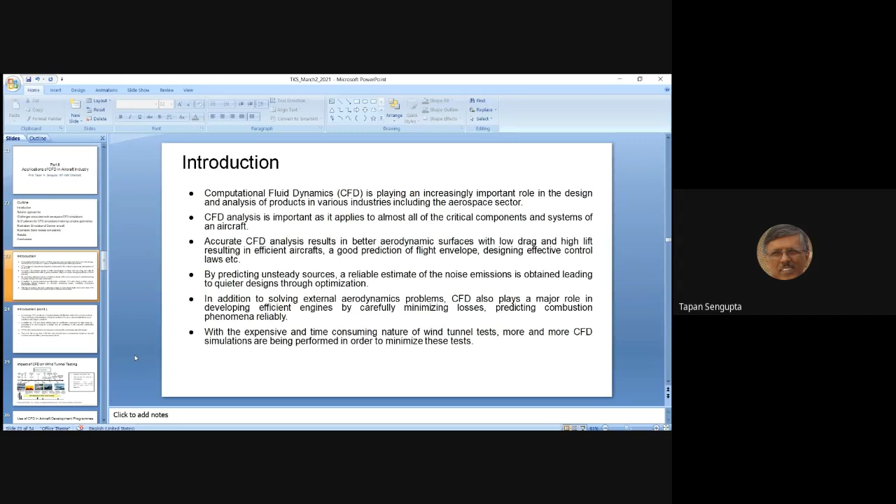It was only after the 1960s that the role of theoretical and computational fluid dynamics came into the picture, and the design loop involved these elements for various subcomponents, the wings and the fuselage, etc.

So you are now being told that increasingly we are going to use CFD results, which will replace the wind tunnel test. But what remains to be done is to calibrate our CFD results with actual flying aircraft data. That is what you acquire in performing flight test.

This is your ultimate test, because wind tunnel tests are also limited. Why? Because we do not test the full scale aircraft. We actually use a small scale model of the flying component, and that's where the scale effects come in. In addition, you put it inside a wind tunnel, so the wind tunnel wall has its adverse effects and affects the quality of your results. So these are the limitations.

That's the reason we would like to replace as much of wind tunnel testing as possible. And of course, because of the smallness of the scale of the model in the wind tunnel, we do not match the flight parameters. We need to match the flight conditions, and that can only be achieved when you are doing flight testing.

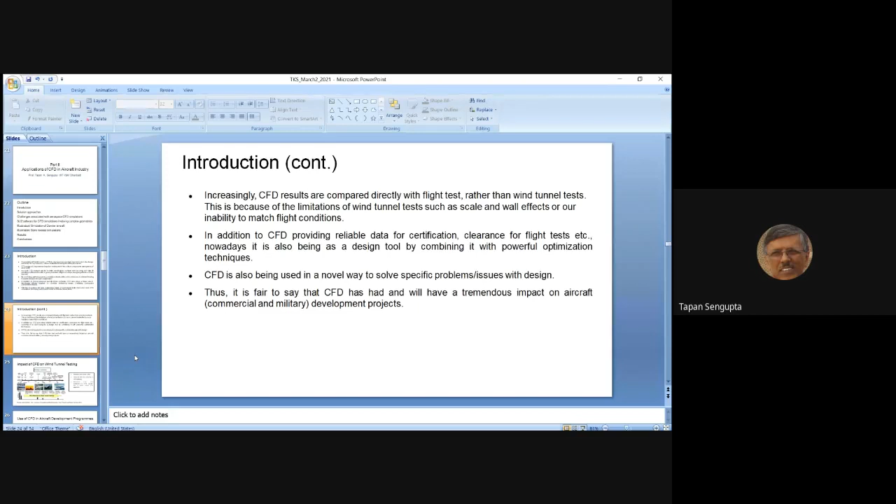So you can see that CFD is doing a very good job. It is taking up a new role to solve specific problems or issues related to the design of an aircraft. Thus, it will be fair to say that CFD has had and will continue to have tremendous impact on aircraft development. I am not going to talk too much about military aircraft, but that itself is a very exciting branch of study, with its own specific problems which we'll probably not discuss today.

Now let me show you a slide borrowed from Professor Tony Jameson from Stanford University, from a talk he gave in 2015 on the status of CFD, from the early days of 1980 onwards up to 2015. The 1980s decade was exciting because it was in this decade that Professor Jameson himself was the first to produce results past a Boeing 747 jumbo jet by solving the Euler equation.

That was the first demonstration of the ability of CFD to tackle a full aircraft, of course excluding the viscous effect, and that was done by Professor Jameson. So he is probably the right person to give this nice talk, and I borrowed this slide from his presentation. As you can see, the tools here relate to the Boeing aircraft series, and various reports and methodologies are given on the top row. The tools existing in Boeing are also given here, involving a hierarchy of formulations, starting all the way from potential flow to the Reynolds averaged Navier-Stokes equations.

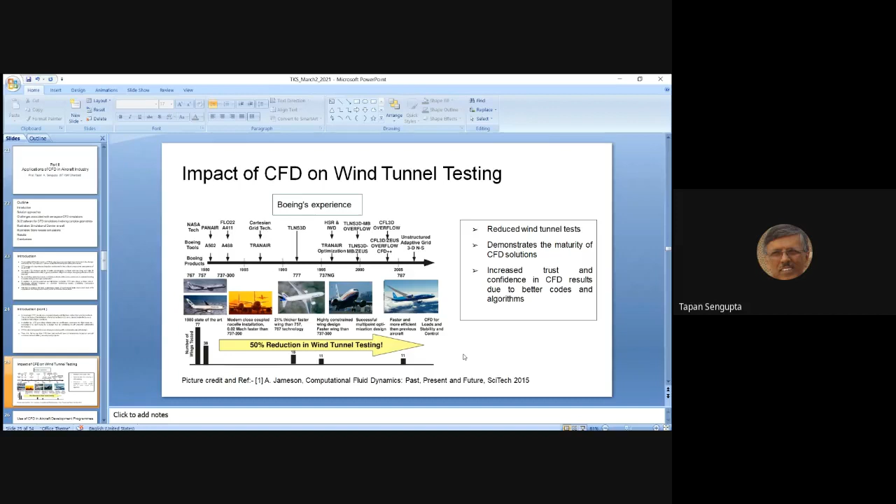Now, we were talking about this use of CFD in aircraft development programs. So you can see that when it comes to commercial aircraft development, this is well documented in that paper I just now referred to, Professor Jameson's AIAA conference SciTech paper.

And this review paper given here below is work reported by Xiao and Cinnella. This talks about quantification of your RANS simulation. And you want to really quantify what? You are using different types of equations, different types of models in the equation, and you want to quantify how accurate those results are. This is published in Progress in Aerospace Sciences. It's not a very big paper, but it's a fairly well documented paper for one to go through and understand.

Both of these references attribute the success of Boeing 737 to the design of the high-speed wing, not only during the cruise configuration when it is flying steady and level, but also how it has actually managed to integrate not only the wing design, but how it is coupled with the placement of the engine. Okay, so this is something that is important.

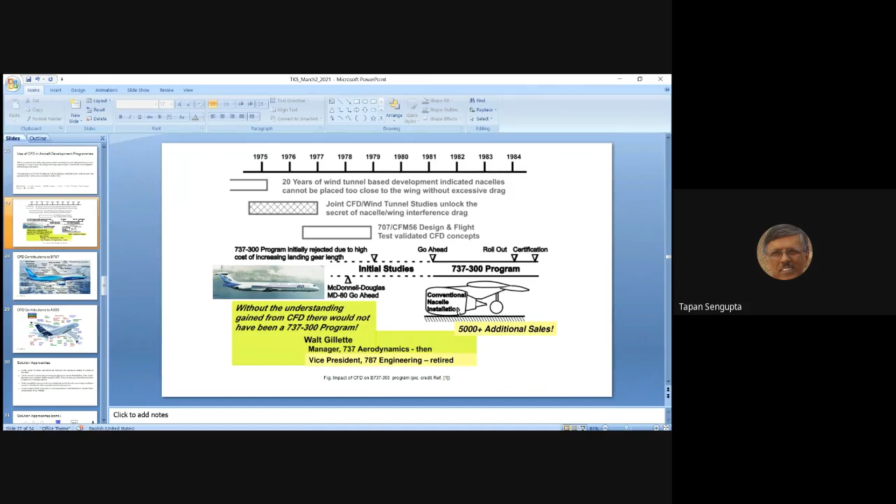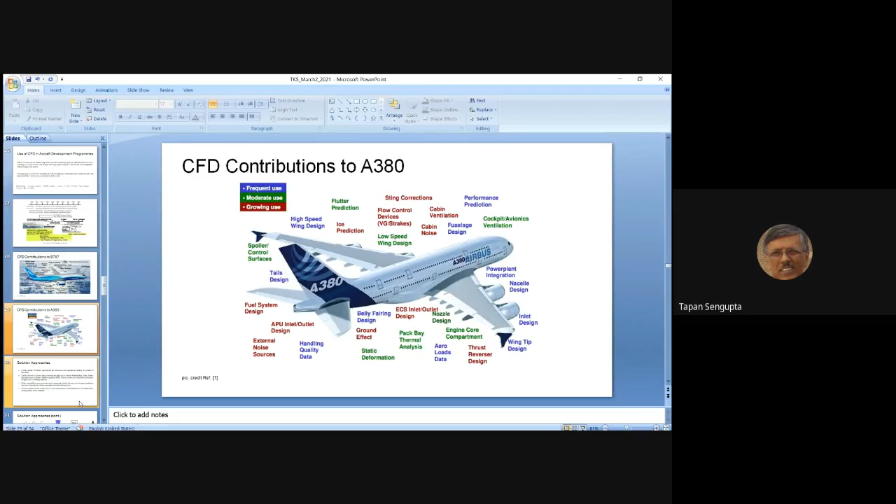So you can see these are essential information. I suppose I'm just sharing information. Maybe many of you are already familiar with it, but still, for the sake of completeness, let me go through the solution approaches, which have various ranges of activities.

For example, I'll show you in the next slide that we started off in the early 60s, where we had a model which was essentially a linearized potential flow model. These are the days where we would use panel methods to solve Laplace's equation. You may be thinking, to solve a linear partial differential equation till 1960?

But let me remind you that during the Second World War, it was Professor Norbert Wiener at MIT who made the first proposal for studying flow past an aircraft wing by solving Laplace's equation, during Second World War, that is in 1944. And it took another 20 years before we actually got the digital computer and started solving the flow past an aircraft wing using this Laplace's equation.

Once this was done, people were interested in trying to predict aircraft performance at higher speed. So compressibility effects come into play, and we enter the transonic flow regime. That's where we came into nonlinear potential flow models. Please do understand, again, we are still making an assumption of irrotational flow. That's why we are using the full potential equation or transonic small disturbance equation in the 1970s.

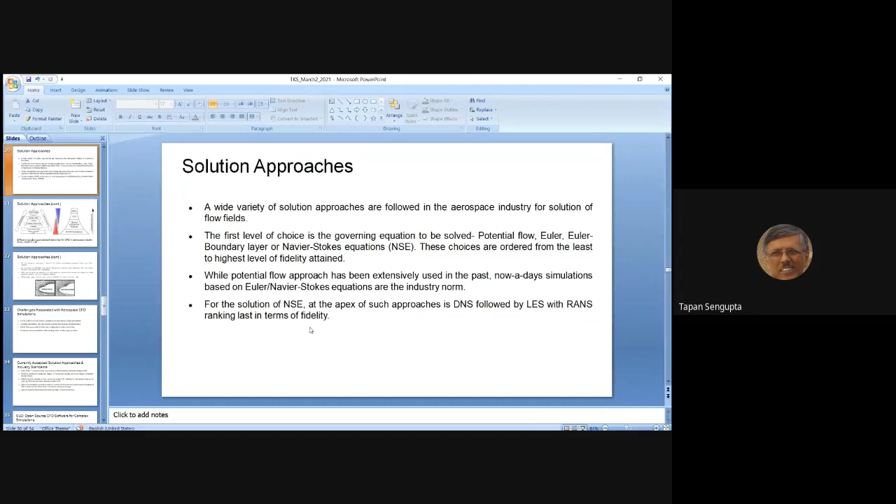So we have now understood what we do. Now, how do we tackle these problems? Tackling these problems requires approaching any given model equation and solving by different methods of discretization. For example, one can do finite differences, finite volume method, or finite element method.

Most of you are familiar with finite difference method. It is the most theoretically resolved part, so I don't need to tell you more about it, but this is the correct differential equation approach. The next in hierarchy is the finite volume approach - it's an integral form of the equation in discrete space. Finite element is actually a weak form analysis, or the variational form of the differential equation.

Finite difference method usually requires structured grid, but these days we also use something called immersed boundary method, which uses Cartesian grid. So for complete aircraft, people are trying to solve the full aircraft solution using Cartesian grid. This is an issue in the making.

The issue is that with finite difference method, you can get much higher accuracy compared to finite volume or finite element method. The advantage of finite volume and finite element method is their usage of unstructured grid - you can see there is no structure here. You can keep increasing the number of cells where you require more accuracy. However, these methods are lower order accurate, so they provide less fidelity, but unfortunately they are more suitable for complex geometry, and that's why most open source software, commercial or OpenFOAM, use this unstructured grid approach.

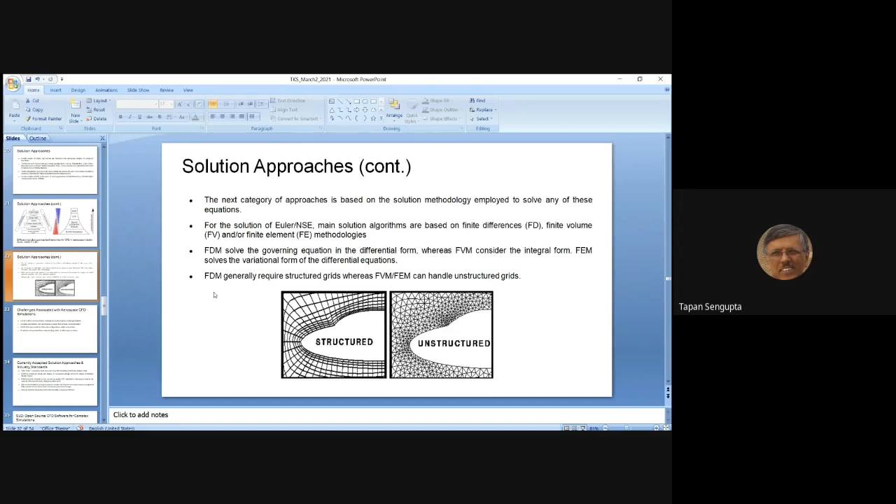So the challenges associated with these are that DNS or LES is impossible for full-scale configuration at this point. However, if we are looking at separated flow past a wing section, looking at the stall of wings, or the landing or climb performance, we still are not there to really solve the problem in its entirety.

That's what we are saying, that full aircraft or turbo machinery simulations essentially involve complex geometries, so there you still are using some of those model canonical problems or unstructured grid method approaches.

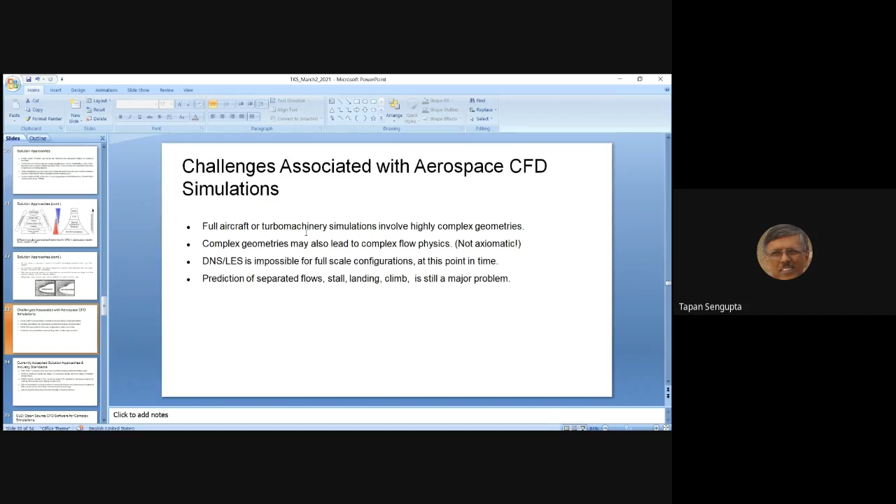There are other methods we can talk about. For example, RANS is employed during late stages of conceptual design and at all stages of detailed design. RANS and its variants are the current accepted CFD standard in the industry. The solvers are dominated by a large number of commercial, in-house and open source finite volume solvers, depended upon because of their robustness and ease of usage.

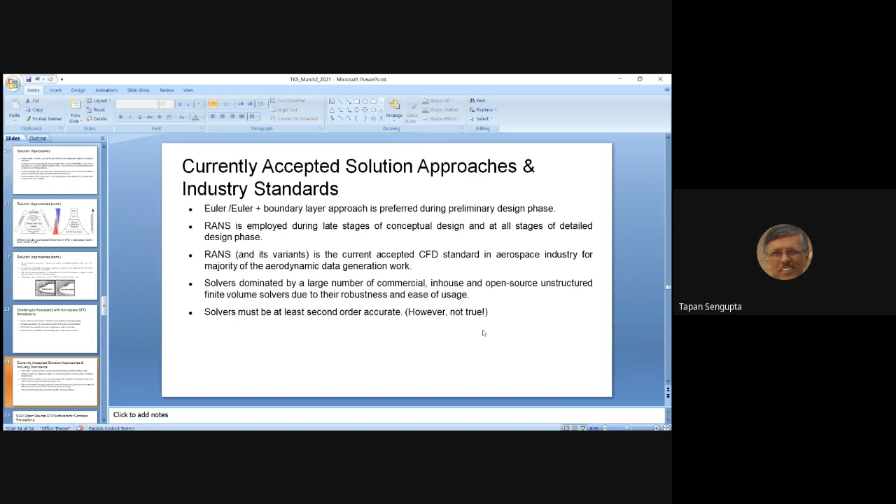One requirement is the solver must be at least second order accurate. Unfortunately, some commercial and open source software do use second order diffusion, so that makes it first order accurate. That's why in parenthesis I said, however, it's not true.

Let me just briefly mention the Stanford University tool, SU2. This is an open source CFD software tool developed at the Aerospace Design Lab of Stanford University, based on C++. It solves various kinds of PDEs, including the Navier-Stokes equation. You can perform not only fluid flow analysis, but also many multiphysics analyses and design problems, and these are available freely.

So this is open source software. Please, if you are keen on using CFD for your research work, do not hesitate, go and use it, because it is designed with CFD and aerodynamic shape optimization in mind. But you can actually also solve problems of potential flow, elasticity, electrodynamics, chemically reacting flows, and many other such applications.

There are various compiled versions, executables available, so you don't have to even worry about them. You got to understand, go through the manual and go through this Python scripts and get ready with your activity.

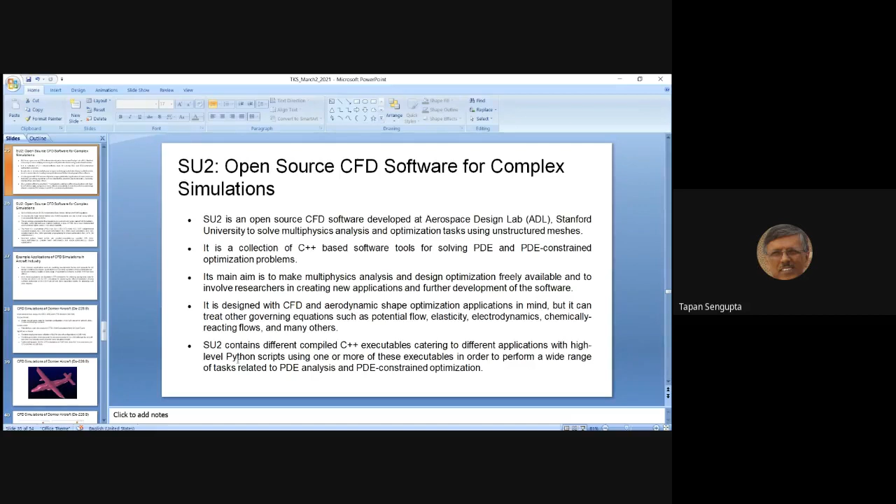So SU2 essentially is in the fluid flow domain, it's a compressible Euler Navier-Stokes RANS solver. It can work in both 2D and 3D, and you can use it for incompressible flow if you use what is known as the artificial compressibility method. Now, the governing compressible flow equations are solved in cell vertex based finite volume formulation.

In recent years, people have started developing the discontinuous Galerkin method, which is basically a type of finite element method. It's a weak formulation, but one of the strengths of the DG method is that it gives you accuracy which is higher than second order accurate.

Okay, and here are a list of some of the executables in SU2. For example, SU2_CFD for the CFD code. Then you have SU2_DOT, it is for design purposes, adjoint analysis. Then you can study mesh deformation, mesh adaptation. Then you can export the solution. Then you can do some pre and post processing for shape optimization using various executables.

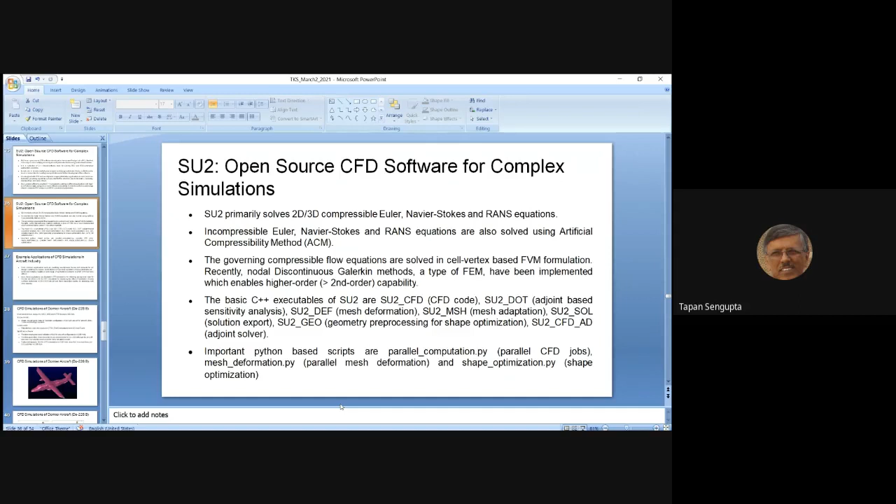Now I'll straight away go and tell you a little bit about some of our activity using SU2 in solving flow past the Dornier aircraft. This is manufactured by HAL since 1982. This work was undertaken by a group consisting of researchers at IIT Kanpur and the CTFD division of CSIR-NAL, led by Dr. Mutkavi.

Okay. The scope of the work was initially to obtain aerodynamic data for the Dornier aircraft. It's surprising that it took almost 30 years for HAL Kanpur to realize that they don't have baseline configuration data, and that was achieved after 30 years of manufacturing it.

The codes we started using were panel code, RANS code, then Fluent and the SU2 version, and this actually was very important because with our joint exercise between IIT Kanpur and NAL, we were the first to employ and validate SU2 for various aircraft configurations.

As it was done initially for Dornier, I am told that the CTFD division has used it for various fighter aircraft for the Indian Air Force. So it's pretty good that we have the ability to do that. I am told in recent times that Tejas also wants to get some solutions obtained by SU2. The activity may have just about begun.

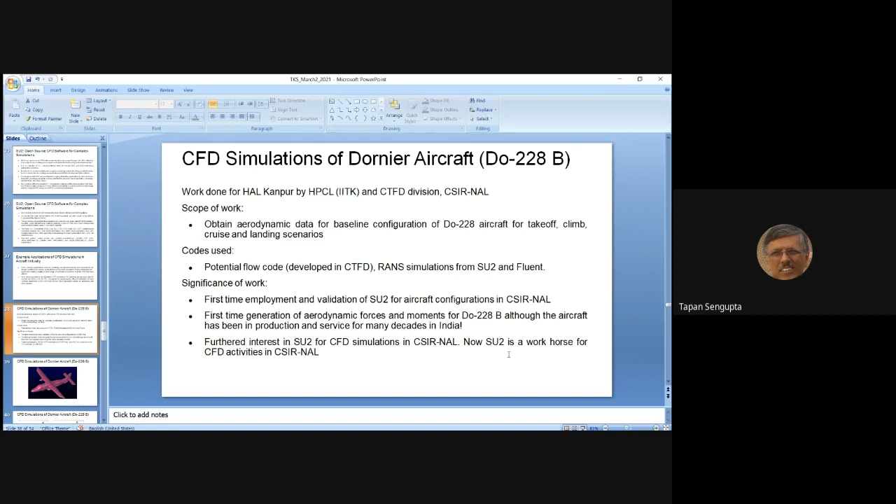So furthermore, interest in SU2 for CFD simulation in CSIR has grown exponentially, and now SU2 is their main workhorse. So that's something that we should remember.

This is the general outlook of the Dornier aircraft. It's essentially used now by Coast Guard, Navy, and Air Force. It looks very rudimentary, but it has a very nice wing section. Unfortunately, the fuselage is unpressurized, so it is fitted with a propeller engine, and it has a ceiling of only about 10,000 to 12,000 feet, not more than that.

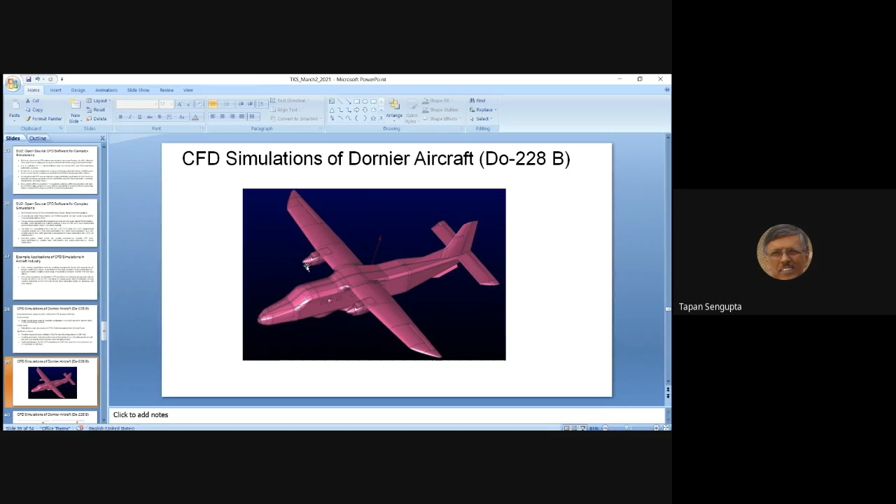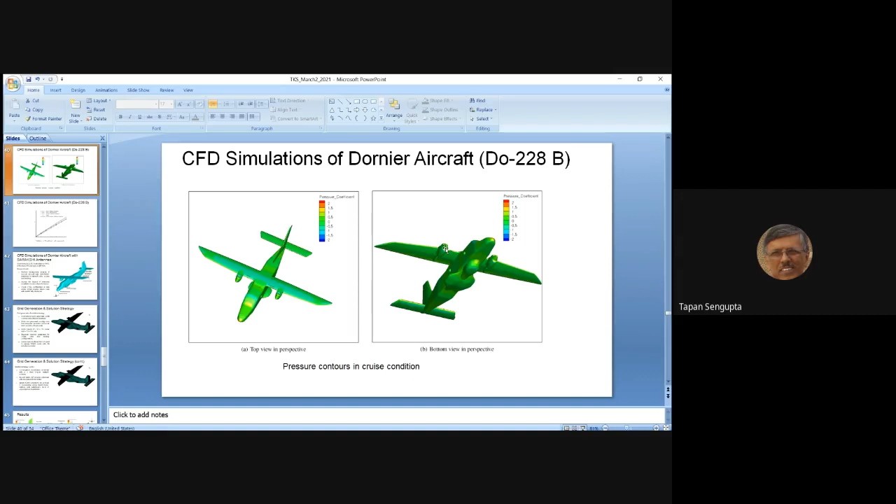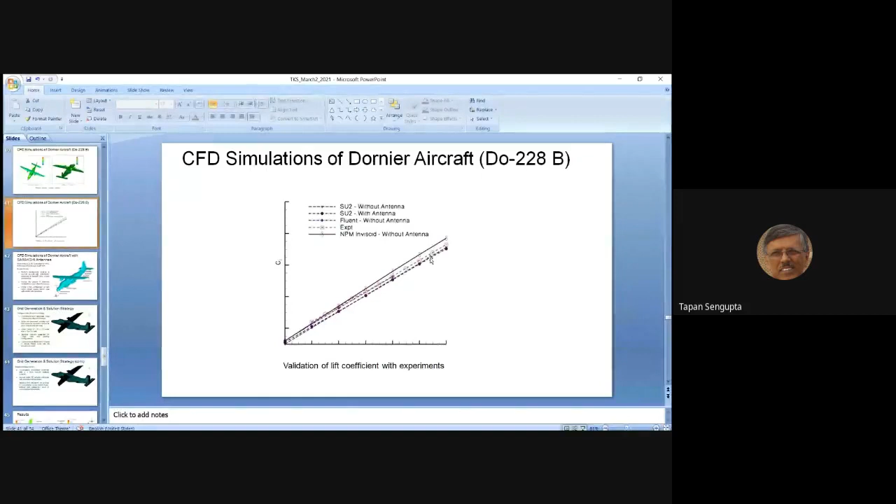And you can see this is a graph which shows lift coefficient plotted versus angle of attack. The experimental result is given by these open circles. You can see that if you compute by Fluent or by SU2, your results match there. Even if you actually use the panel method, inviscid solution, that also gives you a result which is an overestimate, but not very far off. It's a fairly decent, acceptable result there for lift. But that would not be the case if you look at the pitching moment. And of course, for drag coefficient, you will have to at least do a RANS calculation.

With the knowledge of some exercise in this, we were asked by DLRL Hyderabad to find out the effect of putting in this SARAKSHI antenna. This antenna is designed by DLRL so that they can have a 360-degree view of a flying bed.

I have marked various types of antennas. For example, there is a rear fuselage antenna at the bottom, a rear fuselage side antenna, a mid fuselage side antenna, and a wingtip antenna. There are also some additional nose side and nose bottom antennas. In addition, SARAKSHI also wanted to put some additional antennas all around.

So we had to perform this analysis for the configuration during takeoff, climb, and cruise.

And we have to check if the configuration is safe under a single engine failure case. Suppose the aircraft is trying to land and one engine fails, then you'll have to fully deploy the rudder. When the rudder is fully deployed, it's a very difficult configuration for a pilot to land, and it creates an asymmetric flight condition that the pilot has to keep under control. So this was the case that was studied.

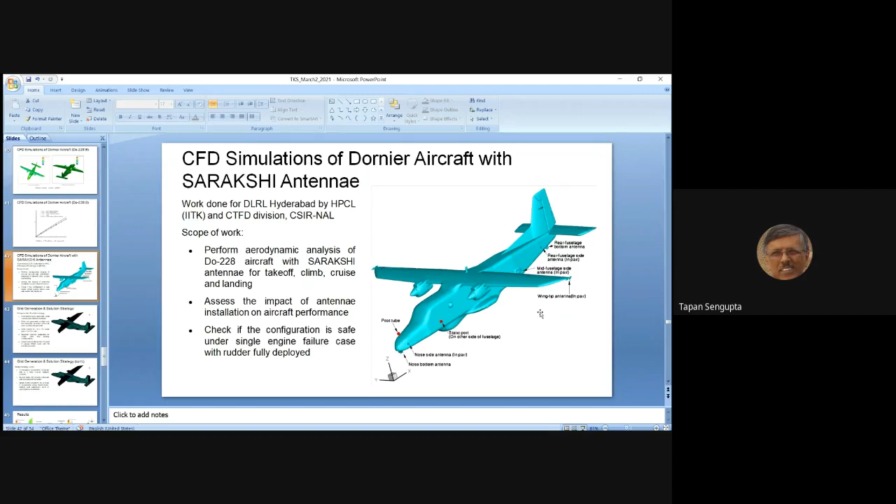We used this kind of gridding on the surface. Wherever there are antennas, we put in an extraordinary density of grid points, and the grid used for this RANS solution had 30 to 70 million points.

Separate meshes were generated for cruise, climb, and landing configurations, and we used version 4 of SU2 with a steady RANS model. The turbulence model used was the Spalart-Allmaras model.

For its approach to steady state, this uses a multi-grid scheme for convergence acceleration. It also uses the Jameson-Schmidt-Turkel second order scheme for numerical stability, and in addition, it uses the Venkatakrishnan limiter.

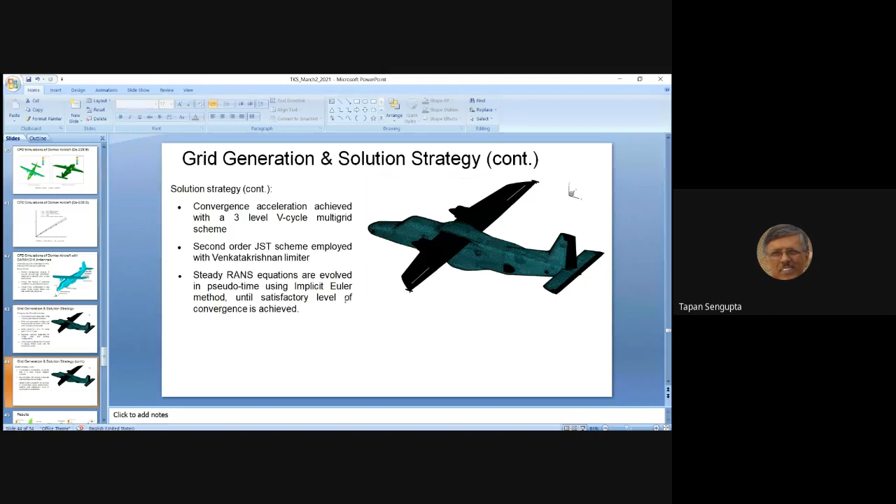This is a kind of limiter to control numerical instability. Steady RANS equations are evolved in a pseudo time, or you can use what is known as an unsteady RANS approach. We had done partly both of this, and it is now doable. It uses an implicit Euler method for solving this, and we continue.

This is what you get to see in the pressure coefficient result, shown here as the top view. You can see that this is not a very good aerodynamic design. Wherever you see this darker shade on the yellow side, it indicates basically an adverse pressure gradient region. Even the control surfaces are not free of that kind of problem. The maximum, of course, is at the nose point, that's where you have the pitot tubes, etc.

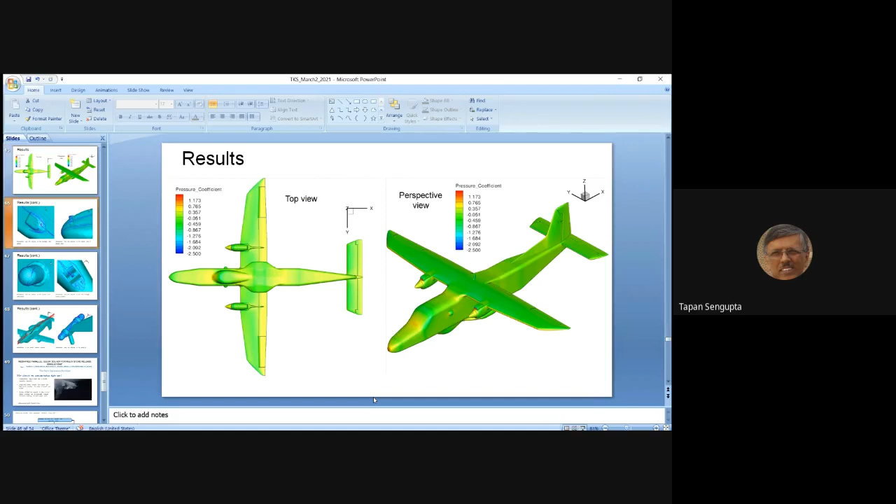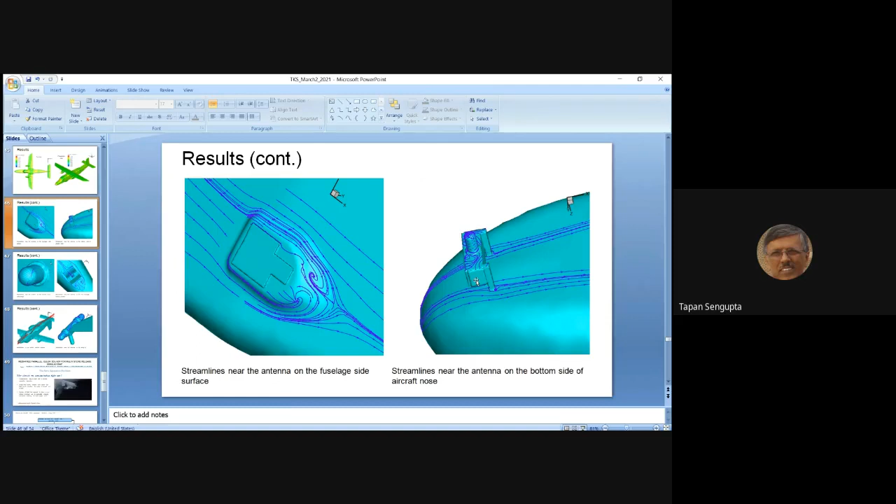This is the antenna near the nose of the fuselage, and you can see the very bluff shape of this antenna that has been put in. This is one of the antennas fitted on the side, and this is the rear fuselage bottom surface antenna.

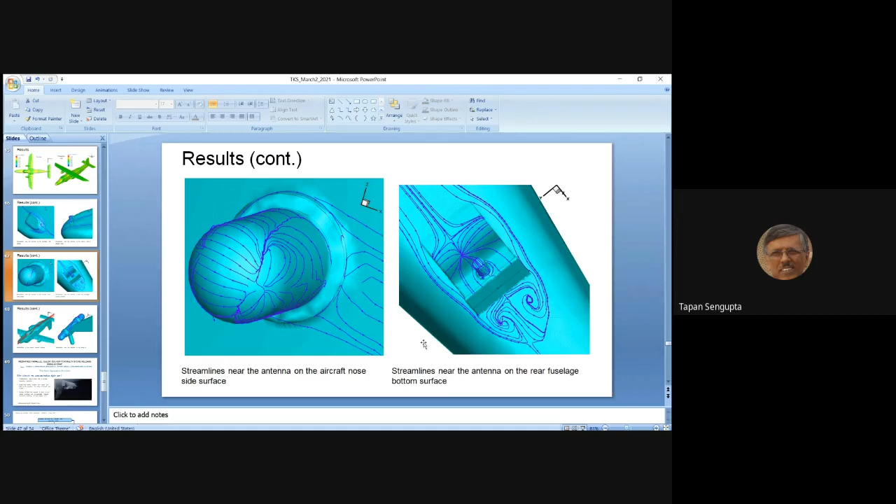If you look at the flow field at the bottom of the aircraft, we have just flipped the figure by 180 degrees to show you that these kinds of attachments, which have been added as this aircraft kept performing for the last 30 years, create quite a bit of non-aerodynamic attributes in the flow field. For example, this is the antenna fitted at the wingtip.

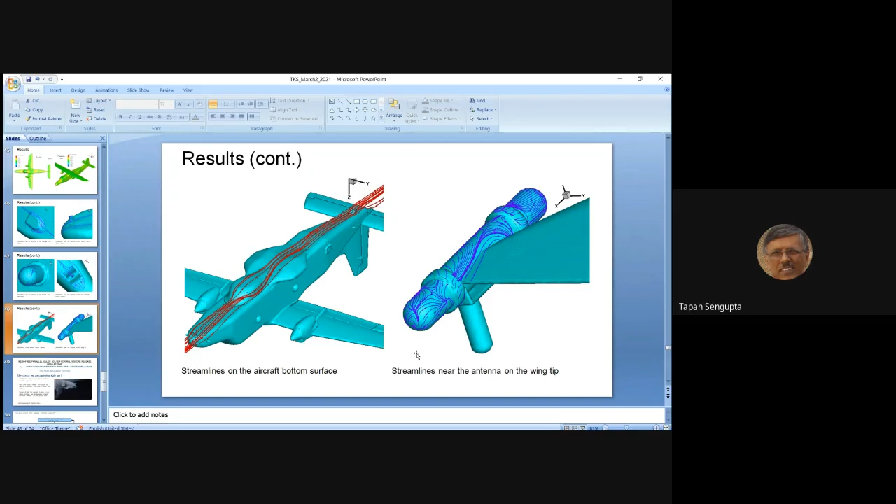I must tell you that from 2007 onwards, we have been supporting all the antenna activities of HAL Kanpur for Coast Guard applications. Now, let me show you some of the recent activity. This is shared by Dr. V. Ramesh and his team, along with Professor Deshpande from JNCASR.

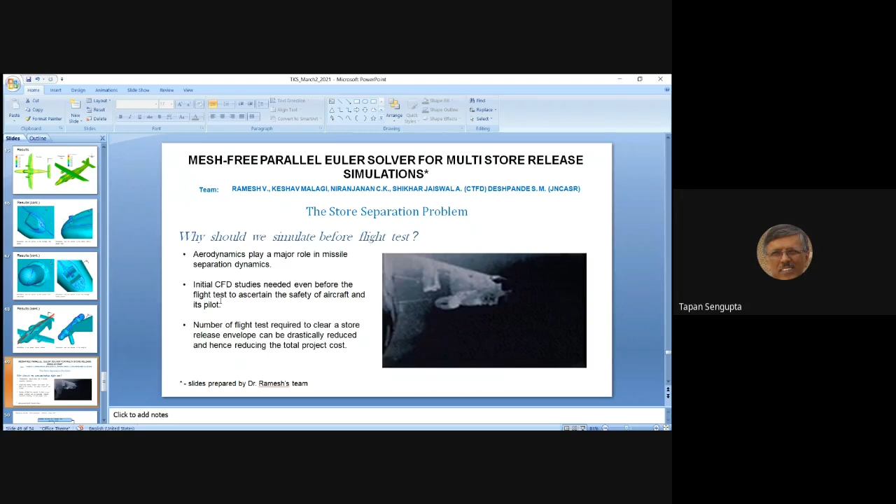What you are seeing here is that when you deploy a missile from an aircraft, you do not want the released missile, before it fires, to come and hit any of the aircraft surfaces. To avoid doing that directly in flight test, you do an enormous amount of safety studies. You can imagine this is a very complex analysis because of this. What I have been telling you so far is essentially for a particular configuration, we are solving steady RANS, a time-averaged RANS solution.

Now for store separation, you generate the mesh, find out the aerodynamic forces and moments, and then treat the store as a 6 degree of freedom body, allowing the stores to fall. The characteristics of the stores, their locations, and how they are ejected come in as input to this 6 degree of freedom solver along with the aerodynamic load. You find the motion of the ejected stores and where it goes in each small time step.

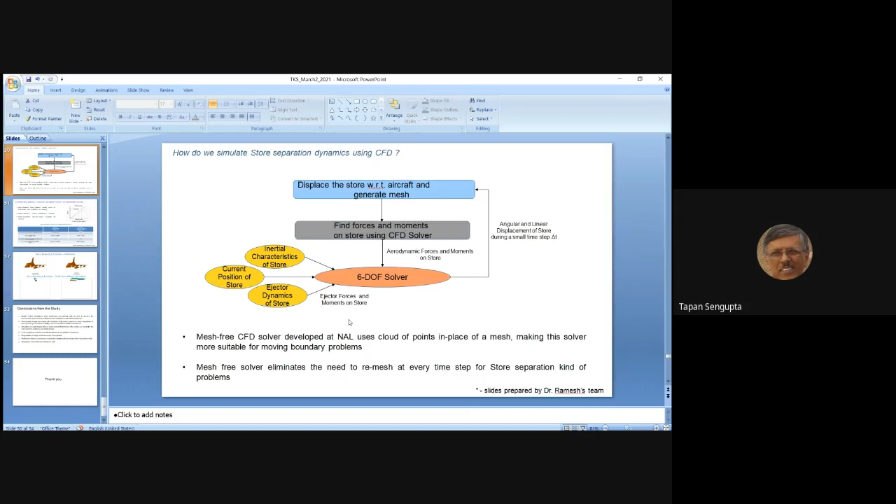Now you calculate the full aircraft load. The aircraft is not only the basic aircraft, but also with the release load. You keep doing this as long as needed to check whether it is safe to go ahead and certify that it is okay to release.

This is done using parallel computing. Take the store separation problem: if you do it on a serial computer, it takes about 2 months of computing to perform a trajectory simulation for one particular case. When done using a parallel computer with 512 cores, that 2 months came down to 2 days. That's only a 30-fold increase in speed, but it's still a lot of work.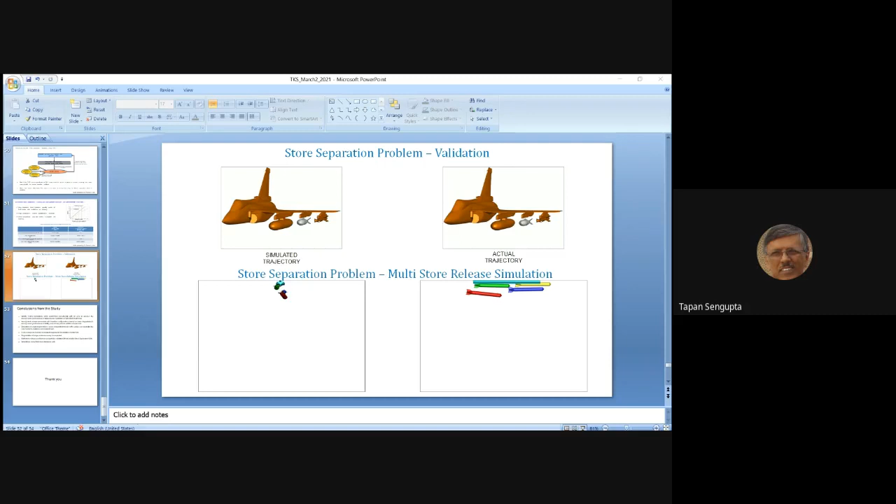I will stop here since we've discussed this enough, and I'll just show you one particular application: a research problem where we try to control transition and separation over an aerofoil section using what is known as plasma control.

This plasma is an active device fitted on the aircraft wing such that part of the device is embedded inside the wing and part is outside. What you see here is the grid used in solving this problem. This is a solution from a direct numerical simulation, giving a time-accurate simulation of flow past this section with the plasma in operation.

This is for an aircraft called the Honda Jet, which uses a natural laminar flow wing with a cruise Reynolds number of about 13.6 million, an angle of attack of 0.27 degrees, and flies at Mach 0.62. This is an executive jet aircraft specifically designed for industry owners who would like their own personal aircraft. I wish I could show you a snapshot, but you can look it up online—it was only released a few years ago, a fantastic aircraft.

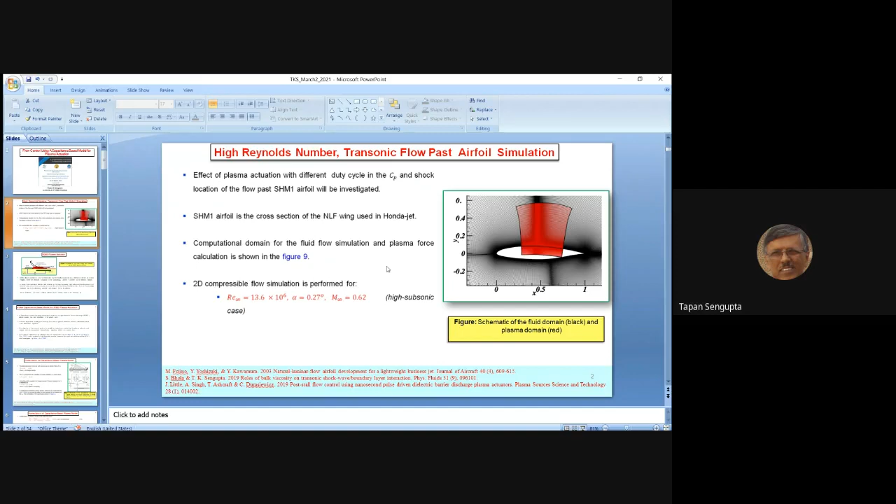How does the plasma operate? Here we show the plasma operation as fitted on a flat surface. It has two electrodes: one exposed on top, another inside. Think of this as the wing surface—you pass an alternating current between these two electrodes, which creates a plasma on top of the covered electrode.

This plasma creates a flow of ions moving in this direction, creating an entrainment, which I call induced velocity—also known in aerodynamics as the Coanda effect. So plasma creates a Coanda effect by which it tries to circumvent the tendency of the flow to separate, because the flow is cajoled, forced to move in the downstream direction.

We create a strong time-dependent electric field using a very high frequency, high voltage AC source, which causes the electrode to ionize the air, and plasma forms above the hidden or covered electrode. The ions substantially accelerate due to the alternating potential, energizing the air through collisions between these ions and neutral air particles. This air accelerates and forms a wall jet—this is the performance principle of plasma actuation.

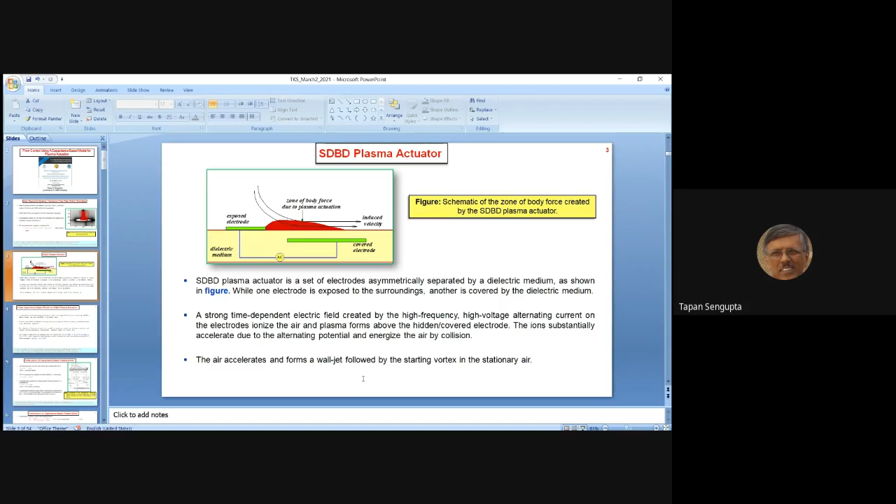I'm not going to tell you much about this, but here are some references below. I suppose Professor Thakkar will share these slides with you so you can take a look at it peacefully. The objective of this present work was to model this body force.

Essentially, the plasma is creating a body force which causes the Coanda effect, and that actually prevents flow separation and transition. So what you'll have to do is model this body force.

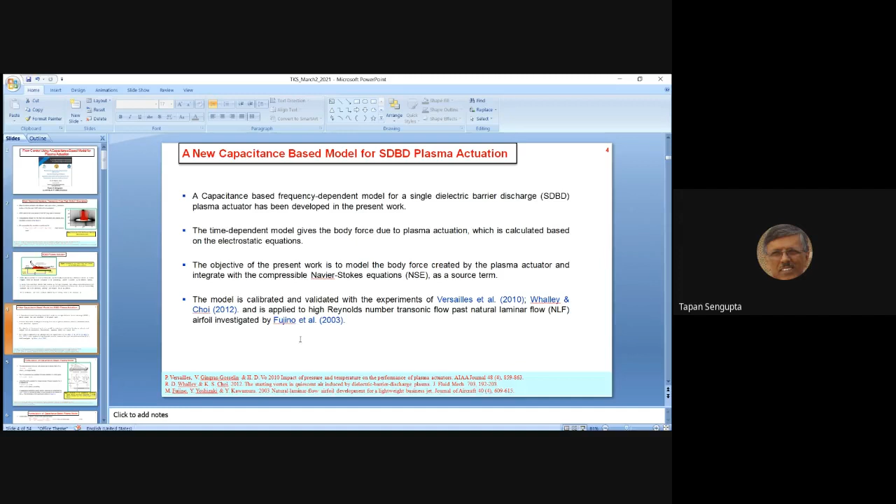This is done by various models, and there are some models given here. Some experimental results are due to this group at Ecole Polytechnique in Montreal. This is another experimental result done in the UK, and we have used it for this Honda Jet aircraft, which is reported in reference 3.

Essentially, you have this exposed electrode and this is the covered electrode. This creates a sort of circuitry, electrical circuitry, which is represented by a combination of resistance, capacitance, and a Zener diode.

I don't want to bother you with all these details, but you can go through this. You can see this in our paper published in 2017 by Pramod Bagade, Shomyo, and myself. We published in the AIAA journal, you can take a look at this.

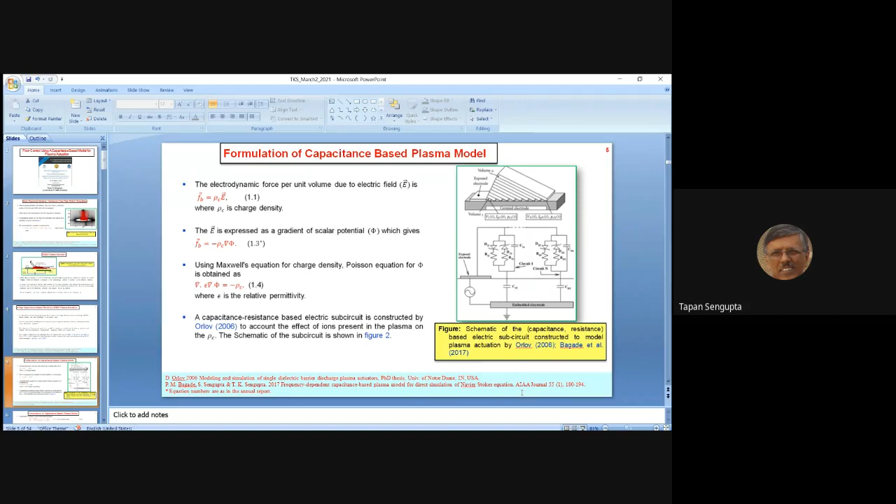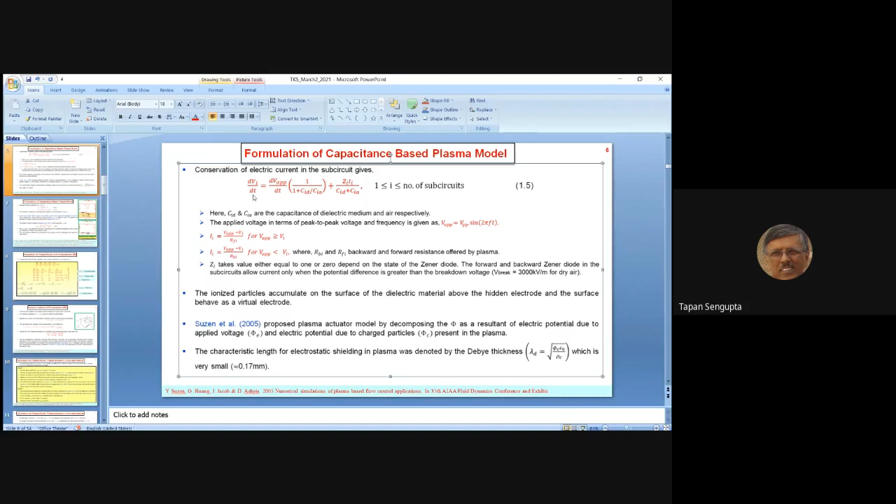What it does is essentially solve additionally the equation for the induced voltage, and from there we calculate a potential, and that potential gives us the charge density, and that charge density in turn gives us the body force. So that's essentially the point.

This is the model proposed by us in equation 1.8. This project is still active with ARDB, Aeronautical Research Development Board. It is still ongoing. We are trying to put in this coefficient K, P and K of F equivalent, and this is what we are continuing in our activities.

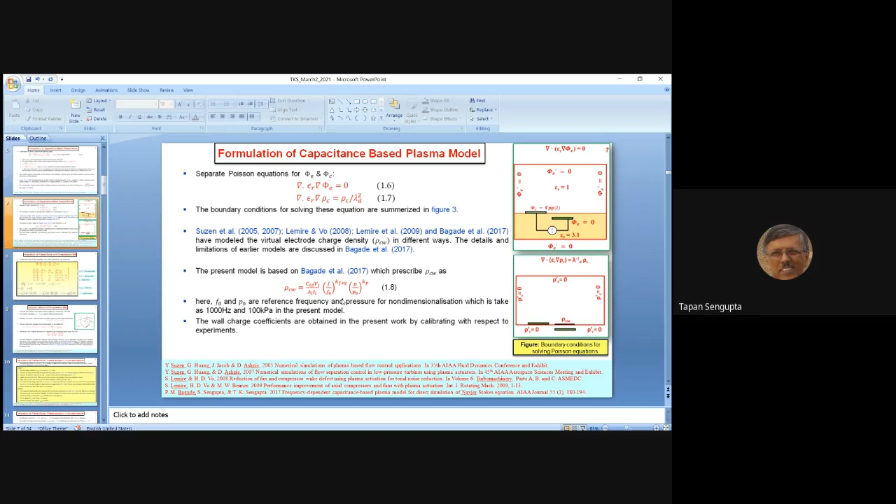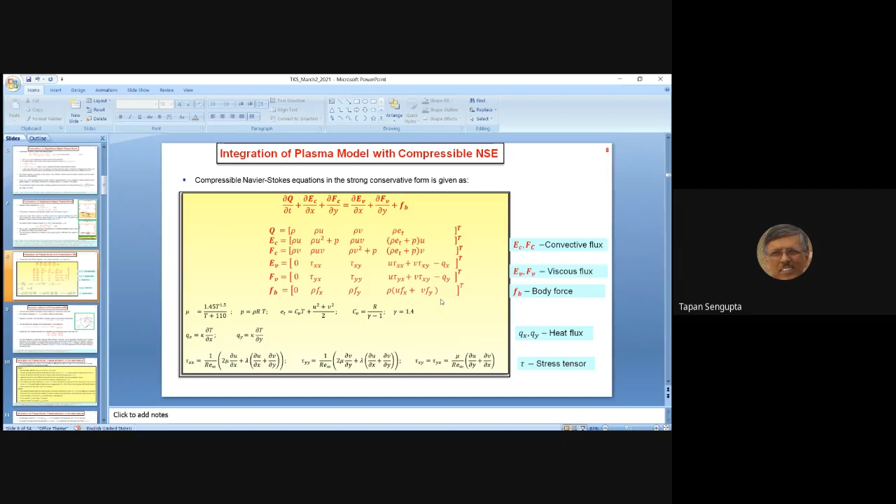So this is what you try to do, and we don't actually solve it in Cartesian frame. We use a body fitted conformal grid, and that's why we go from the physical plane to the transform plane, xi eta plane, using our compact scheme.

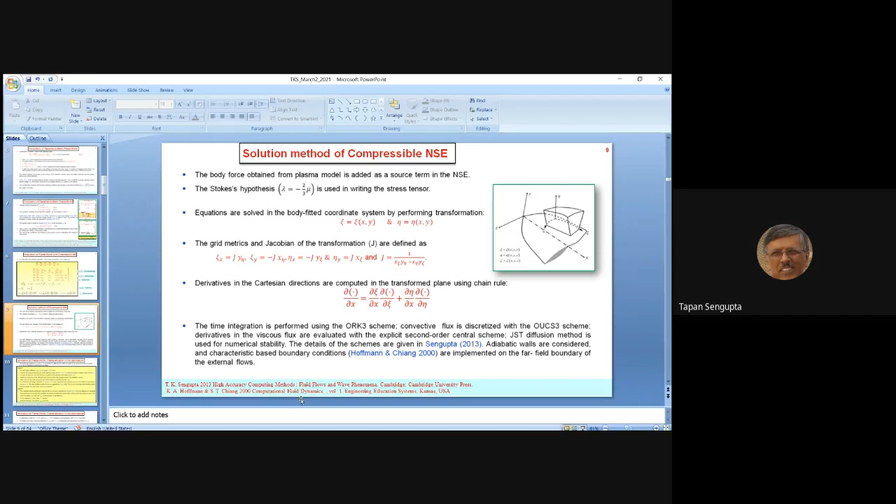These schemes are all given in my book, written here. This is a Cambridge University Press book published in 2013, and you also get various other very useful information about compressible flow in this book by Hoffmann and Chiang. I will recommend all of you have a look at this book if you are interested in compressible flows.

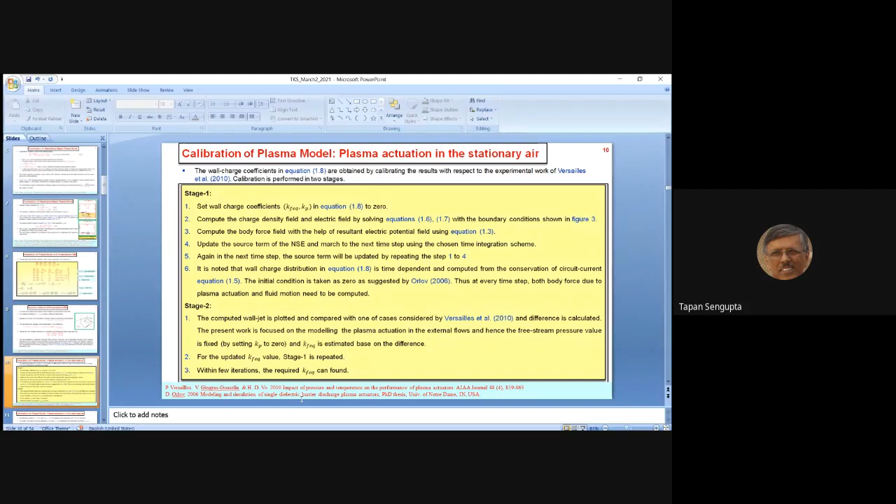I will not go through these detailed steps, it is rather cumbersome, but essentially we try to calculate these coefficients in our model, and we have actually verified our model by using this inside a stationary box in the lab.

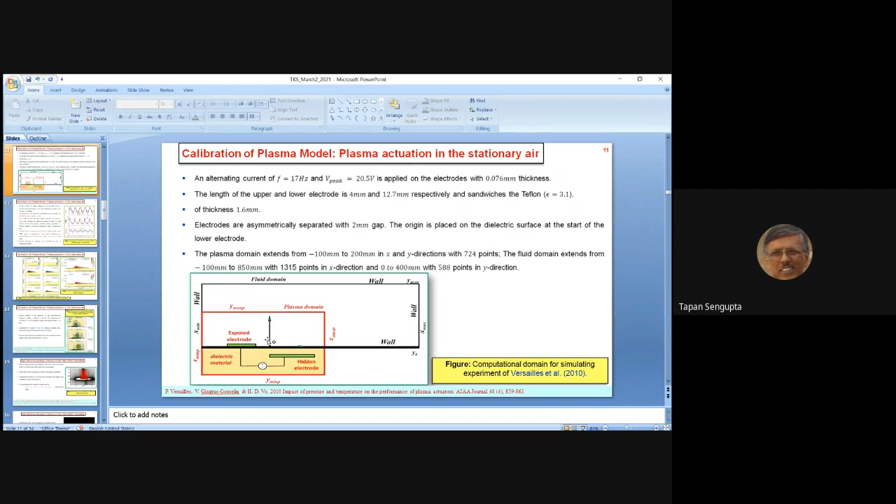So this is the flow domain. You have the exposed electrode, and this is the hidden electrode, and the plasma device is outside the box. We create the plasma and measure various quantities and compute our DNS based result and check how far we have done. This is what you get.

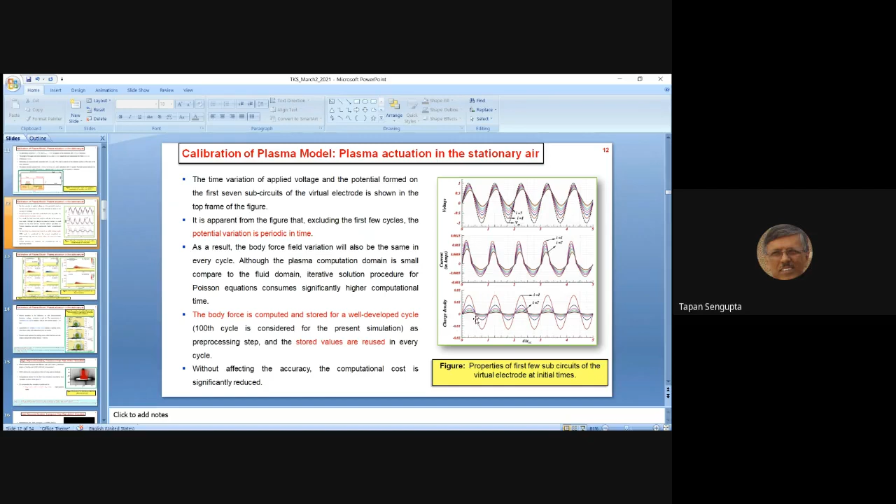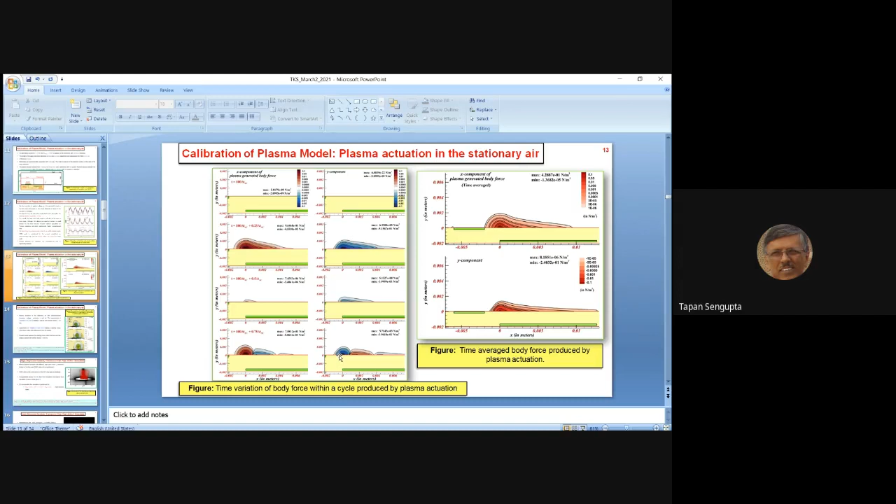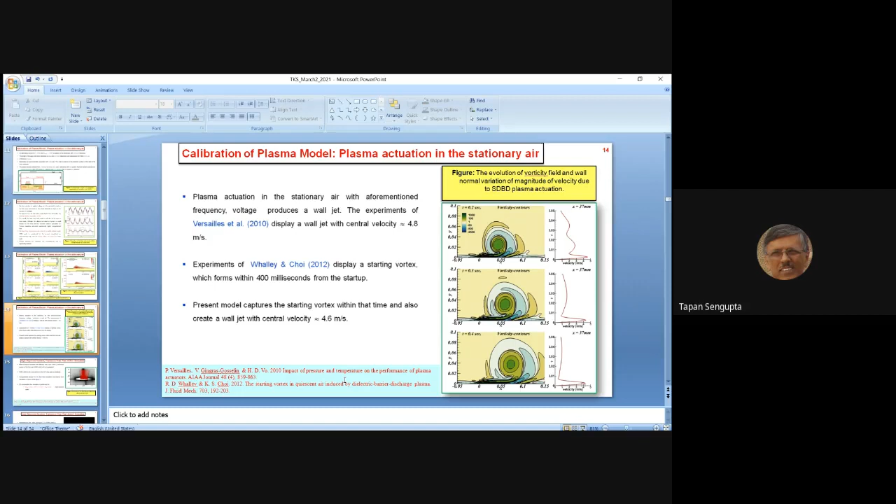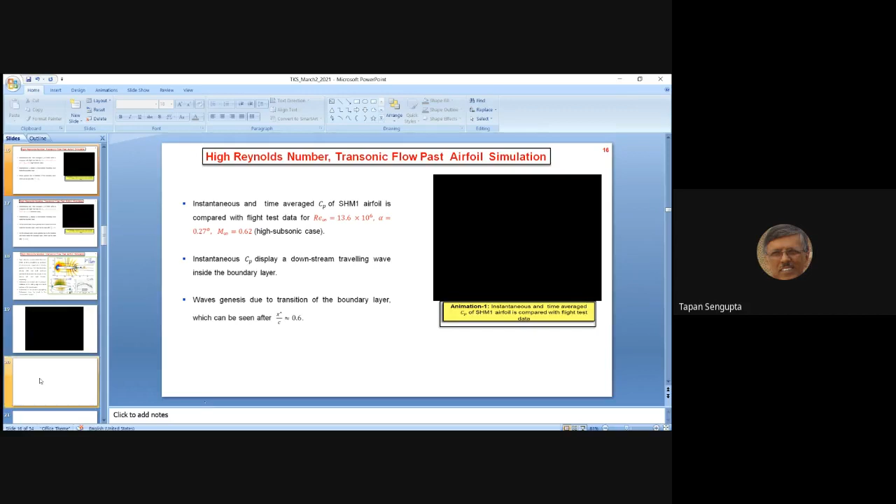It's not visible? Oh okay, let me try to see if I can show it to you by any other means. Is this visible? No sir, it is coming as a black screen. It's coming as a black screen. Let me then try to open one of the things and try to play the video. Can I share this?

Can you see this now? Yes sir, now it is visible.

Okay, so this is the sum and substance of nearly 10 years of activity. On top what you are seeing essentially is SHM1, the name of the aerofoil, and we are showing you the gradient of density contour that will help you visualize wherever the shock wave is going to be formed. That is indicated by this vertical strip here.

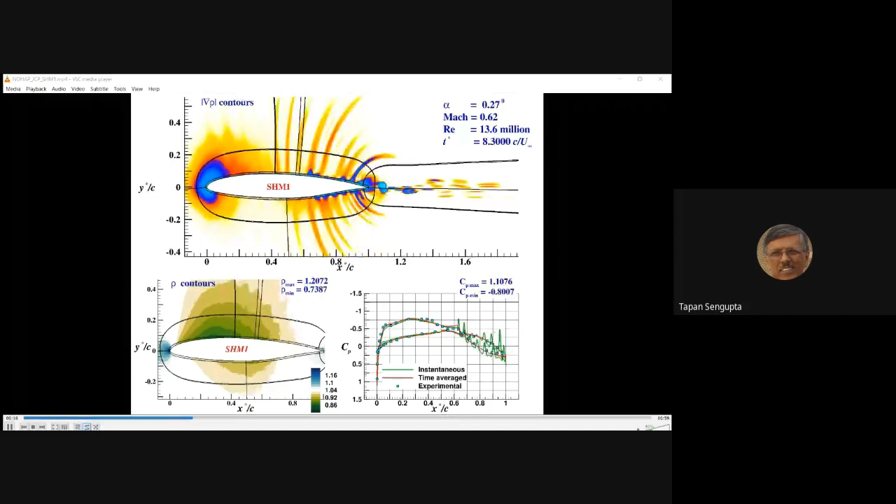So I just would like to give you a sort of conclusion here. I suppose you can see it now.

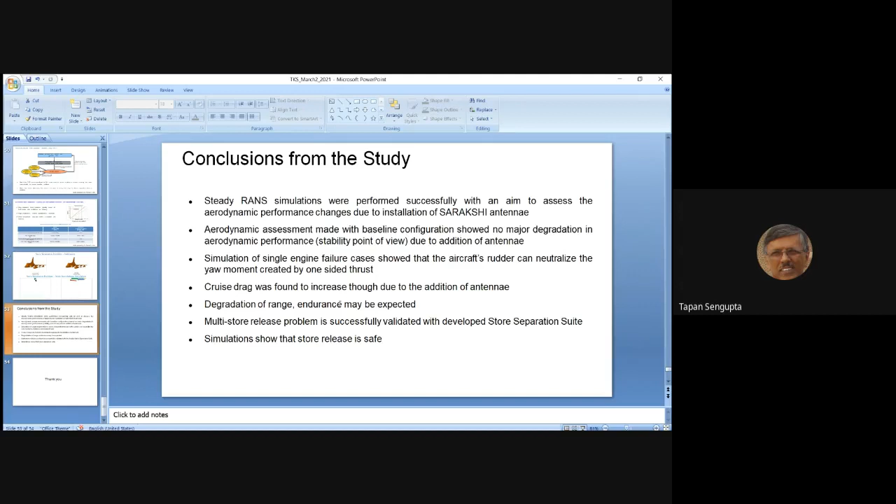Yes, this is the conclusion. I have told you that the current industry standard is steady RANS simulation, and these were performed successfully for a complete aircraft with a very complex system of antennas.

We have provided the baseline aerodynamic data for this aircraft. We have also tried to simulate a case when a single engine fails - then we calculated the cruise drag. We found that it increases drag because of the various antennas, and that leads to degradation of range and endurance, as one would expect.

Then we have shown you some other usage of this SU2 package that I talked about in the store release problem. And of course, I ended with demonstrating some direct numerical simulation results of plasma flow control.

I think I will stop here, and I would be available if you have any questions to ask, if time permits. I don't know what's the situation with our time.

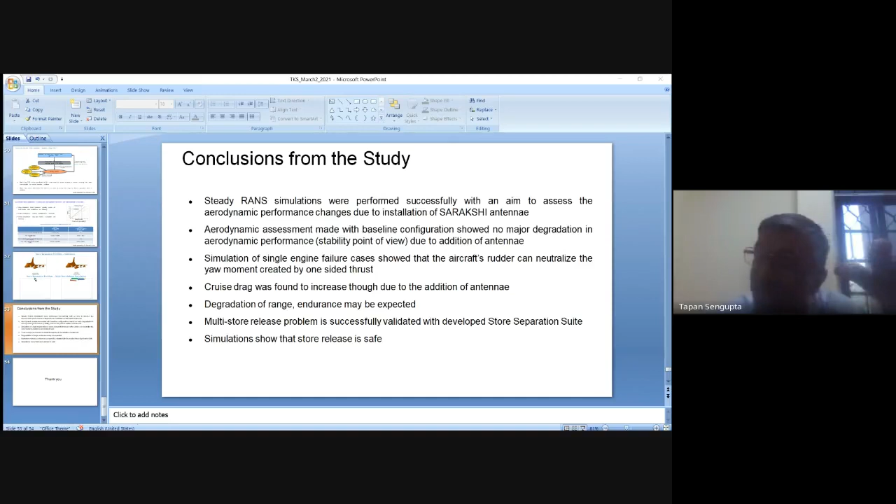And I must tell you that many people were involved in it - it started with V.K. Suman, who is now a scientist at NAL, then Professor Bhumkar, he himself has worked on it, then Dr. Professor Bagde, he has worked on it. Then there are many, many other graduate students who have worked on it. Currently, Prasanna Balaji is working on it in Kanpur. He is now our major active person, and he is carrying out the work assigned by ARDB to take the model to better sophistication.

So what is the name of that software you used? I told you it's based on a compact scheme. We don't market it or anything, so we don't have a name for it. All the things that come out of our lab are mostly our own codes, available with various users who have used it, but these are essentially in-house code.